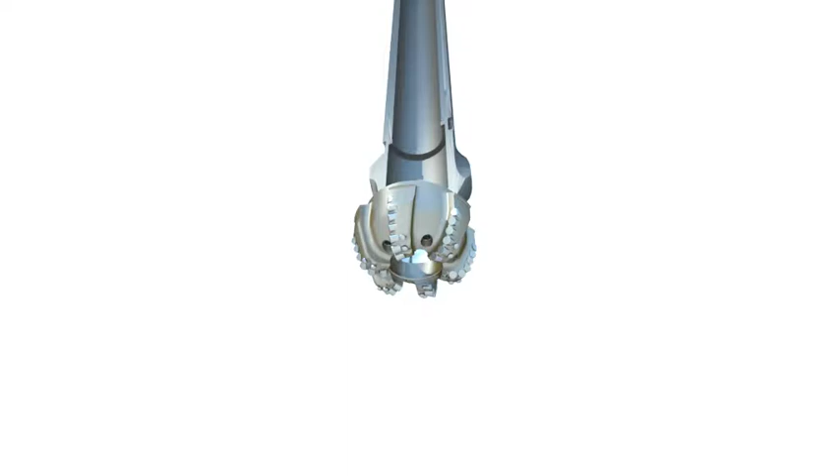In the specialized field of coring, the new Quick line, including Quick Core, Quick Drill, Quick Closure, and of course our pressure system, QuickCapture, are just some of the revolutionary new technologies bringing added value to oil and gas operators all around the world.

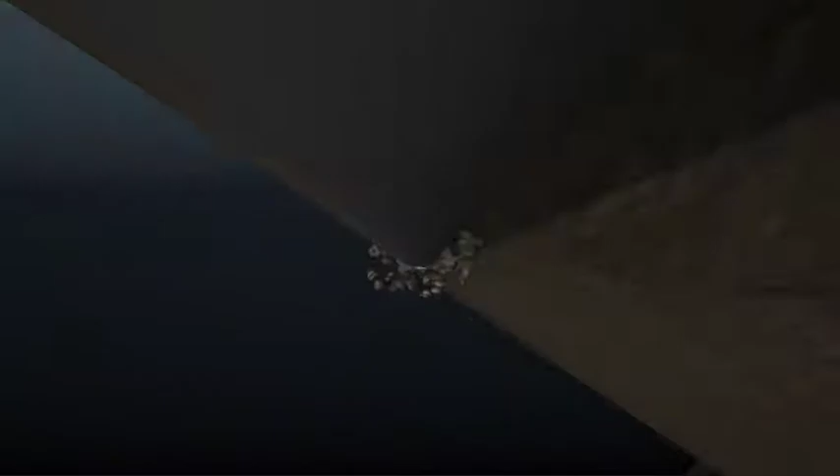The revolutionary technology behind QuickCapture has been developed to collect in-situ gases and liquids, giving a complete and accurate picture of the reservoir to guide productivity while speeding up the decision-making process. QuickCapture coring operations can be operated on both the conventional and wireline coring platform. The following animation depicts an example of running the technology on the Quick product line.

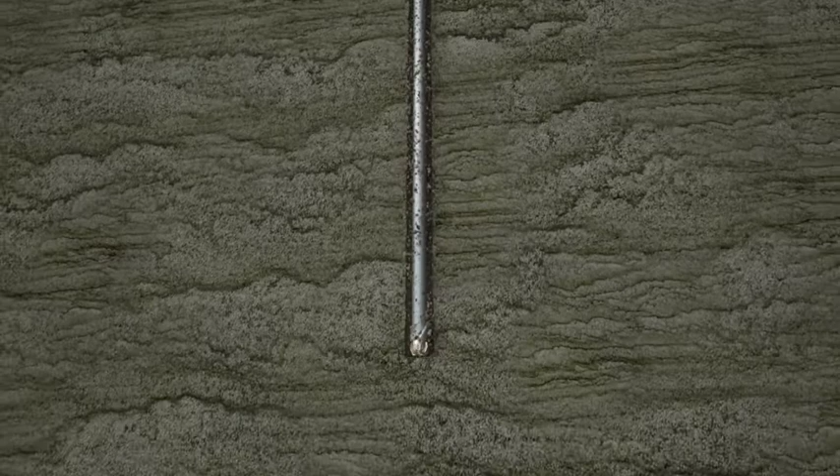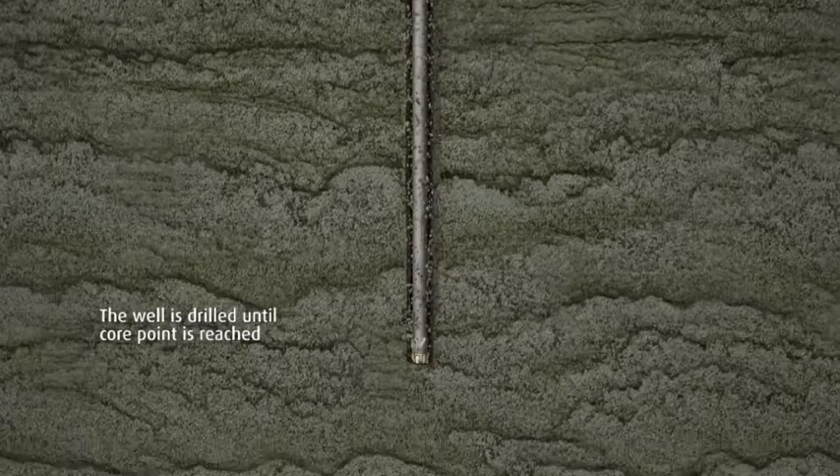The Quick Drill can be used to drill out the casing shoe, drill to the core point, and after coring to drill to TD without tripping the drill pipe. The drill insert is either set at surface or lowered into place via wireline and can be removed and reinstalled at will without tripping the drill pipe.

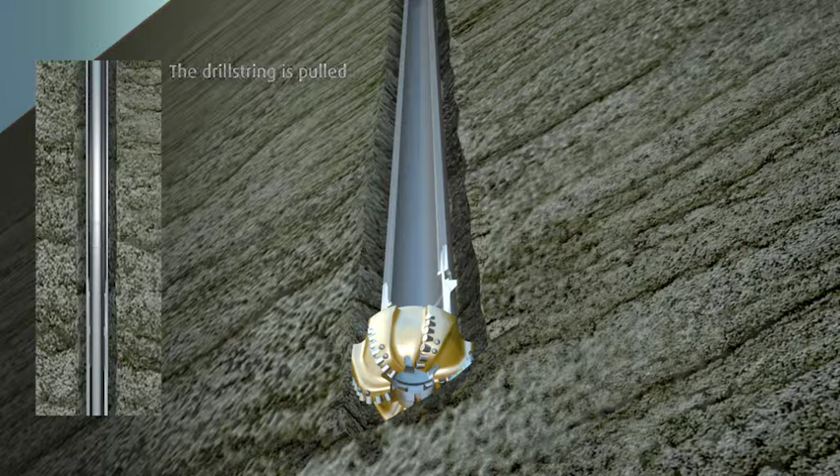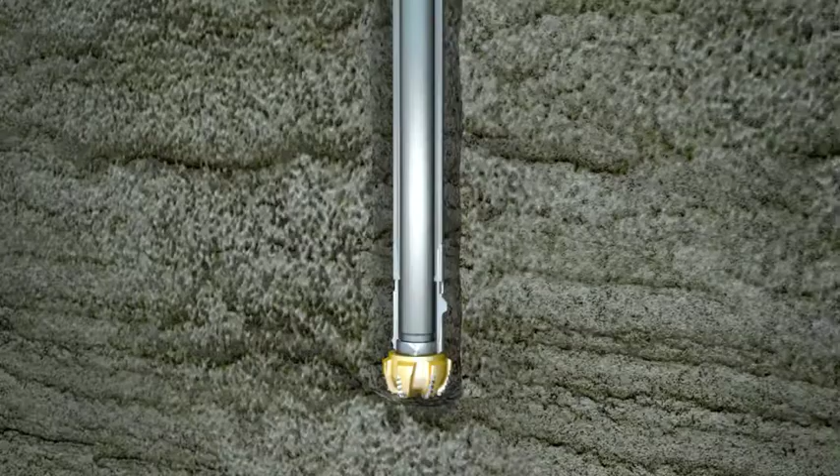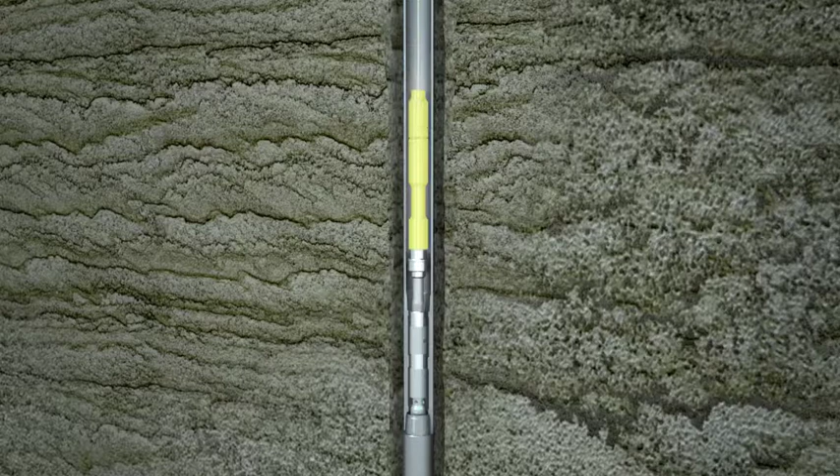Switching from coring to drilling can be done in a matter of minutes, saving valuable time for the operator. Mud circulation can be maintained at all times, while the Quick Drill insert is being set or retrieved, further improving well safety. Once coring is underway, the core is stored safely and securely in the inner barrel of the coring assembly. Once the barrel is filled, the inner barrel assembly can be extracted from the core barrel via wireline.

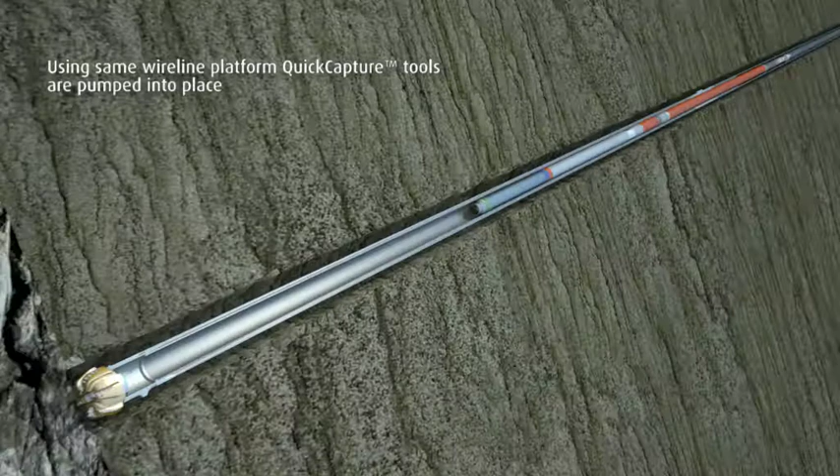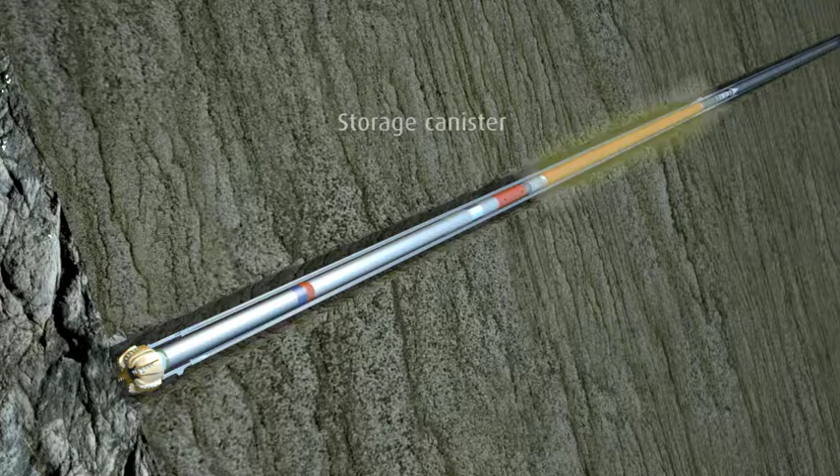Once the QuickCapture coring interval has been identified, the pressure coring assembly is pumped into place using the same wireline platform without having to trip tools out of the hole. The QuickCapture outer assembly consists of the same swivel assembly, outer barrel, and core bit. The inner assembly consists of a gas storage canister meant to collect any expelled gas or fluids during the trip out of the hole. The telescoping sleeve is used to collect the core.

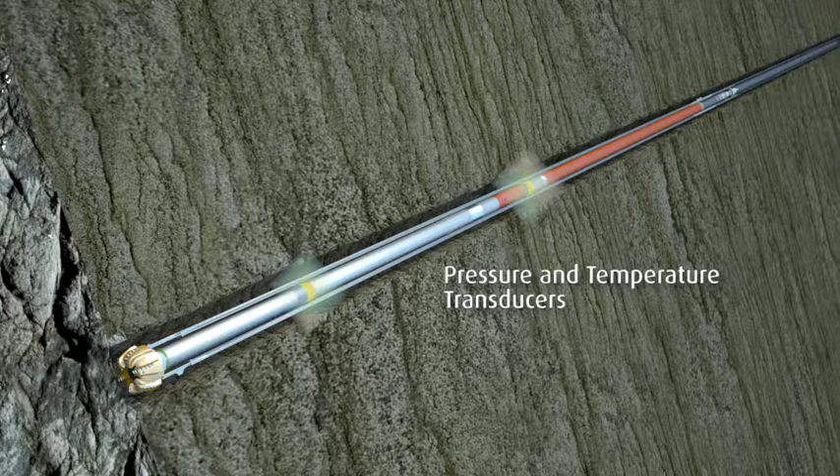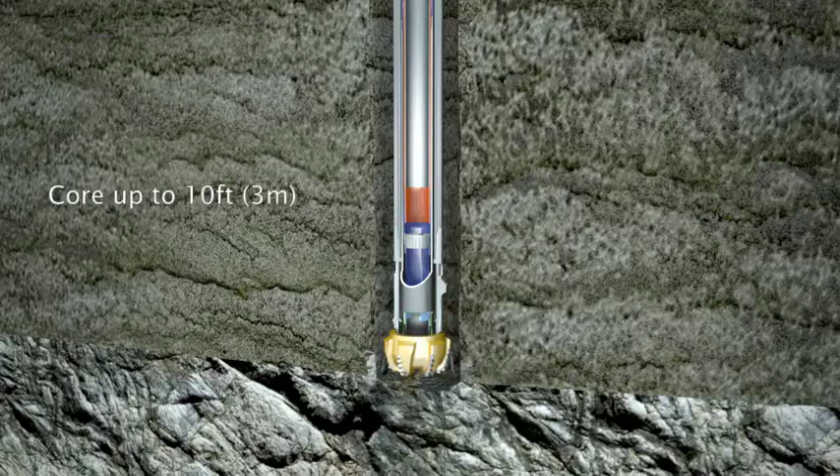Pressure and temperature transducers are used to monitor coring operations and the trip out of the hole. All of the core and associated gases and fluids in the tool are sealed by a proprietary sealing mechanism. Coring then commences, collecting up to 10 feet or 3 meters. After the interval is cored, the assembly is hoisted off bottom to break the core at the bit.

The wireline is run down and latched onto the QuickCapture coring assembly. An initial pull begins to set and stroke the tool, allowing the core to pass the valve assembly and seal the tool. A secondary pull disengages the tool, and the inner barrel starts the trip to the surface. As the tool is tripping out of the hole, all gases and fluids that are expelled from the core barrel are collected in the canister on top of the tool.

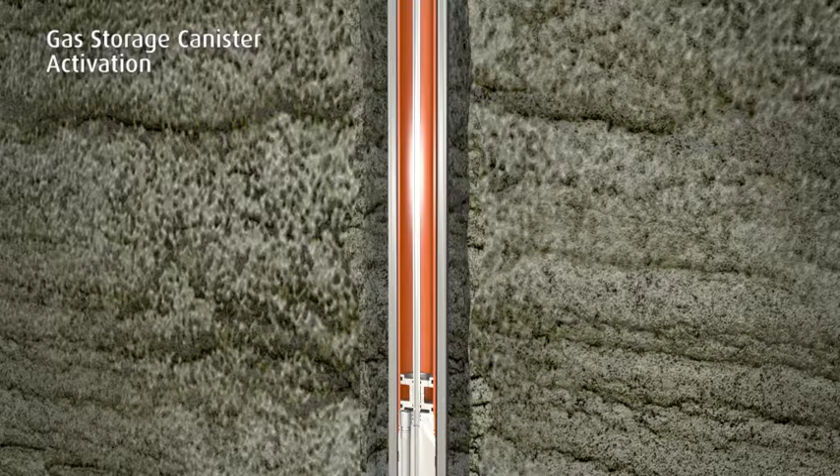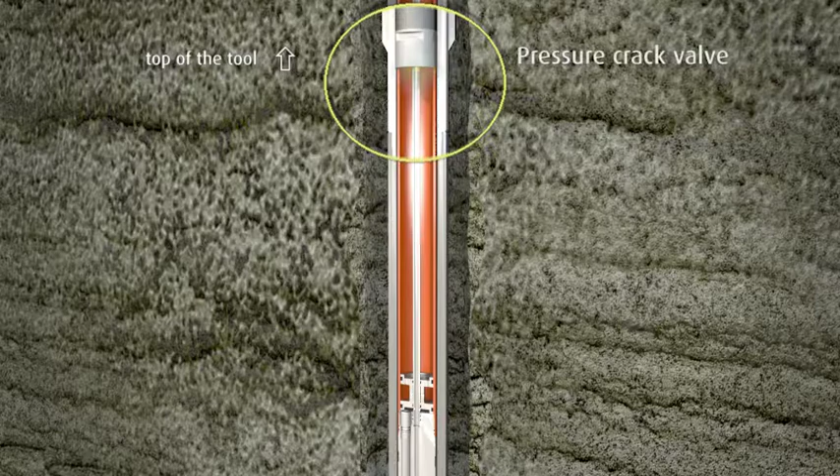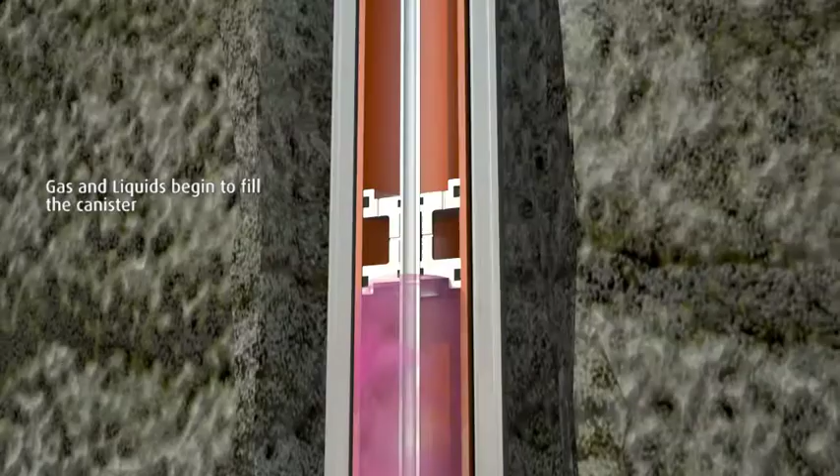The tool is not allowed to reach any pressures above 1000 psi, so as the tool is tripping out of the hole, all gases and fluids that are expelled from the core barrel are collected in a storage canister on top of the tool. Each canister is fitted with a pressure crack valve and pressure and temperature recording transducer. The pressure relief valve works by a pressure differential preset on the tool to allow communication between the barrel and canisters once the desired pressures are met.

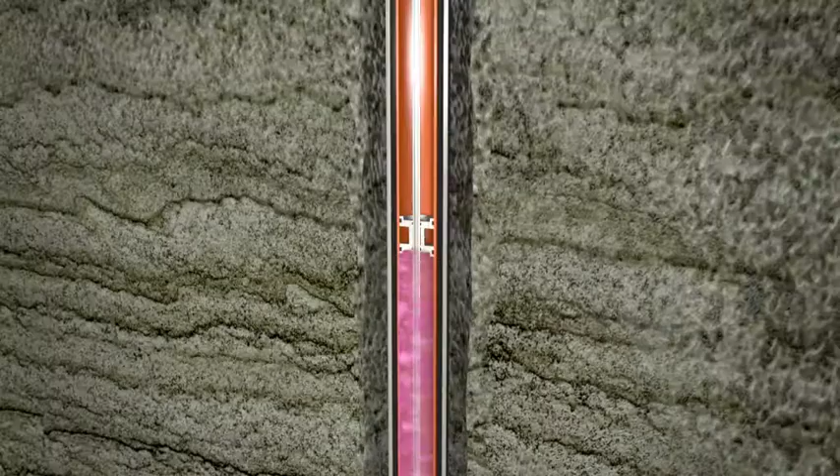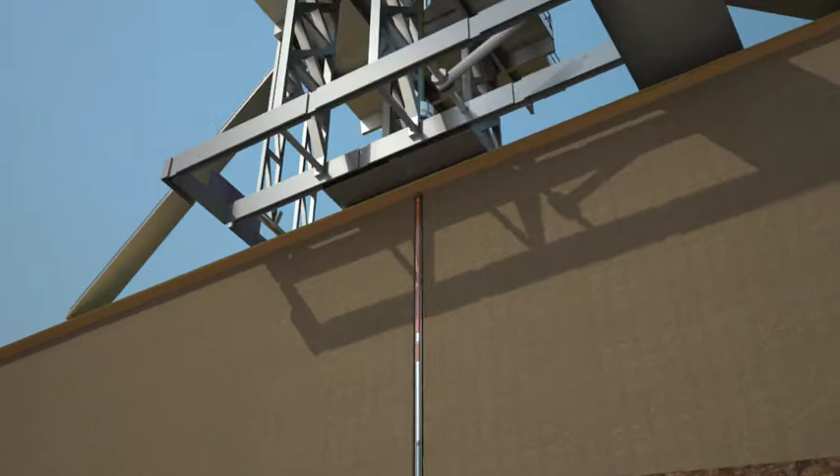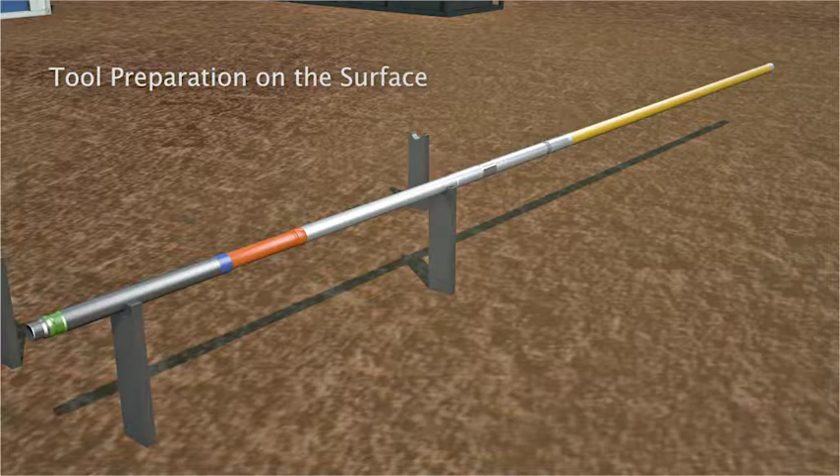As another safety precaution, the tool is fitted with a pressure relief valve on the barrel and canister. In case of any failures in the tool due to plugging or malfunction, pressure will be released from the tool until it falls below the set operating pressures. Once the tool reaches the surface, it's laid down and the barrel and canister recovery process begins. The tool assembly is broken down into separate components.

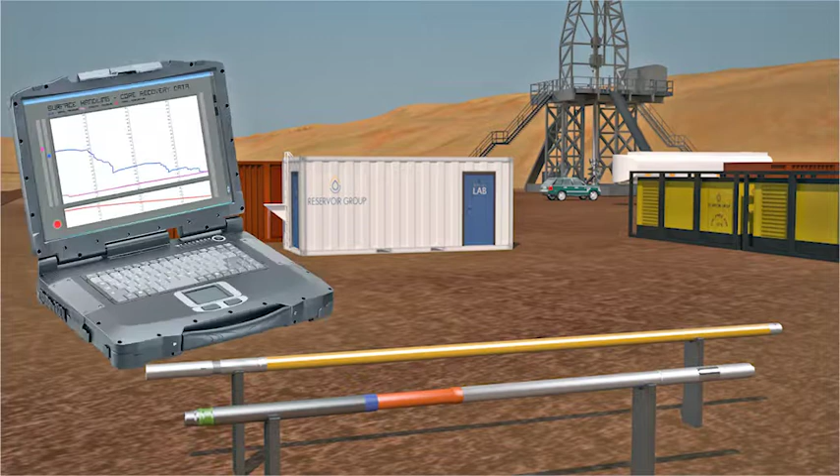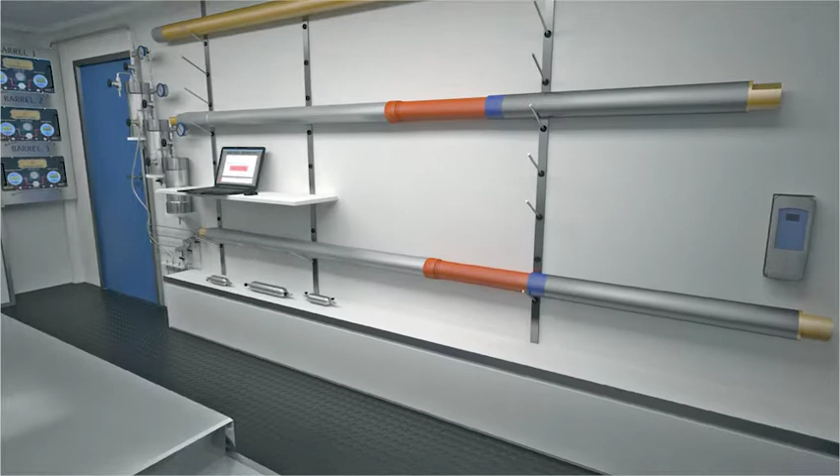Pressure and temperatures are downloaded from the barrel and canister to ensure downhole operations were successful, and the components can be safely managed in the on-site laboratory. The on-site lab is designed to handle multiple cores and canisters simultaneously. As the core barrel is still a live system, it becomes the first priority once in the laboratory. The temperature of the tool can be increased, maintained, or cooled to match the reservoir type or reservoir conditions. Custom designed heat blankets can be utilized to simulate reservoir conditions.

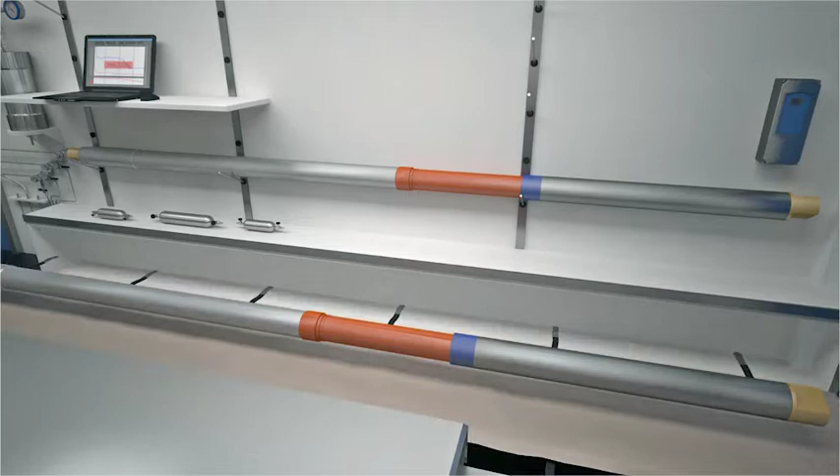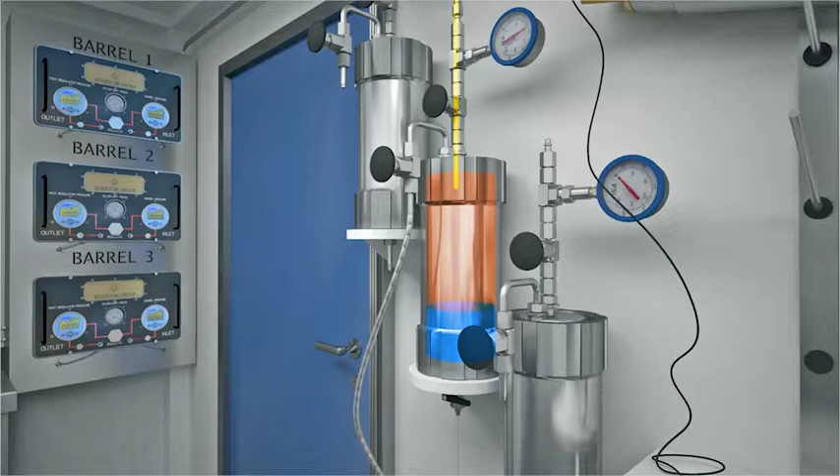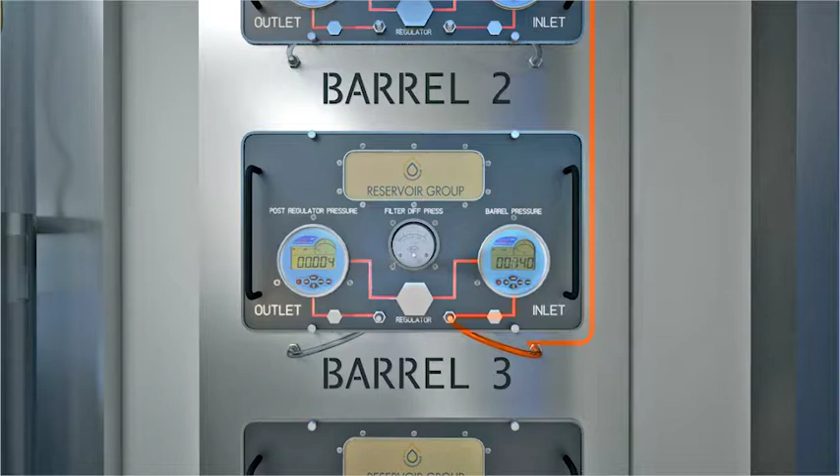The barrel's temperature and pressure is continually monitored during the depressurization process. At first, the pressure between the barrel and the separator is slowly equalized to minimize dramatic pressure drops that may affect the quality of the core. Fluids are separated out to eliminate contamination into the downstream analytical equipment. Pressure from the barrel is transferred to a pressure management panel to monitor the barrel and control pressure transfer to the gas measuring devices. The panel can monitor up to 3 individual barrels or canisters simultaneously.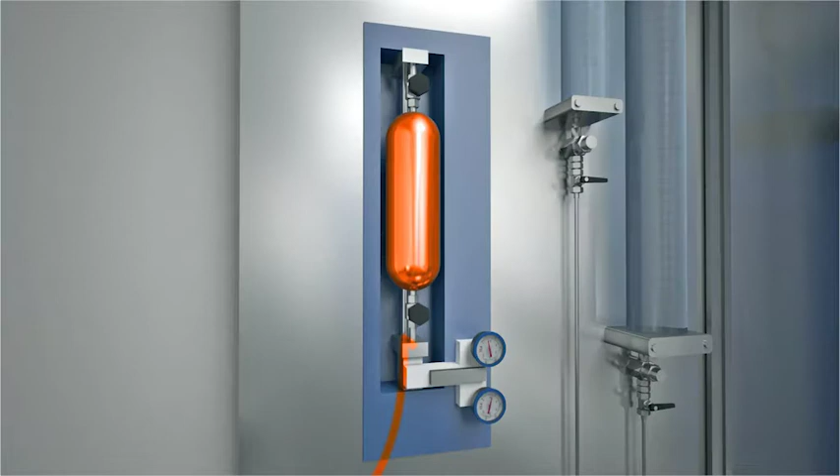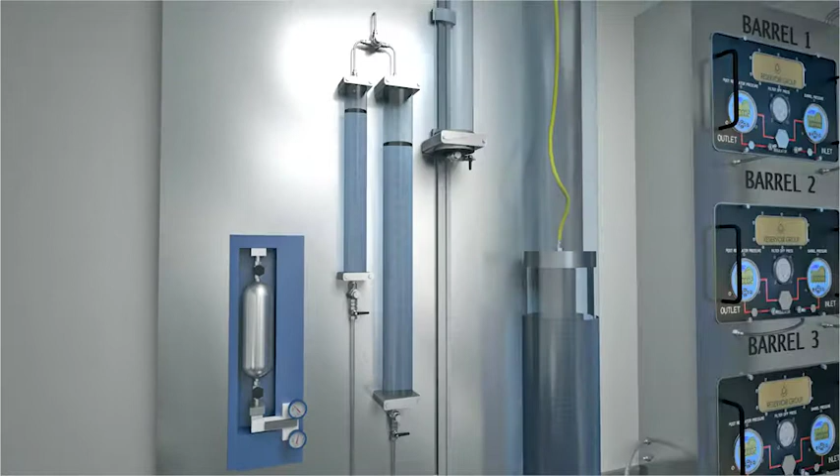A mass flow meter is set to control flow to the measuring devices. Initial flow rates are measured using a wet test meter. Gas samples are routinely collected for future composition and isotope analysis. A gasometer is utilized as a redundant empirical measuring device to validate total measured gas. In low gas volume situations, a manometer will be utilized. All fluid from the separator is collected for future laboratory analysis.

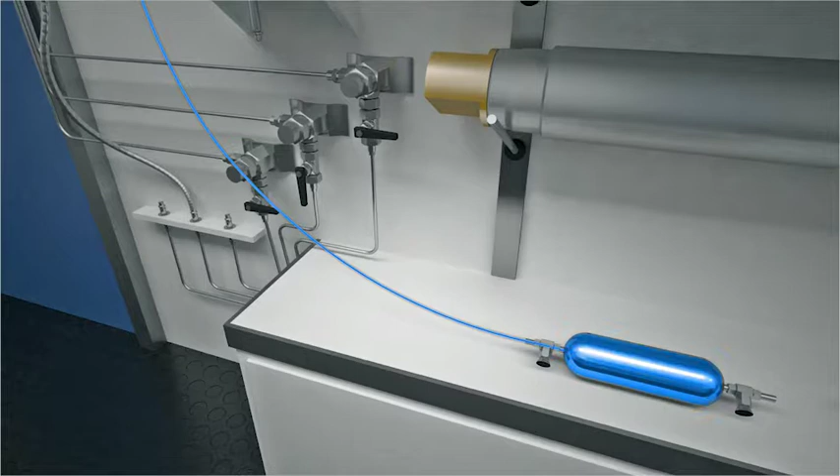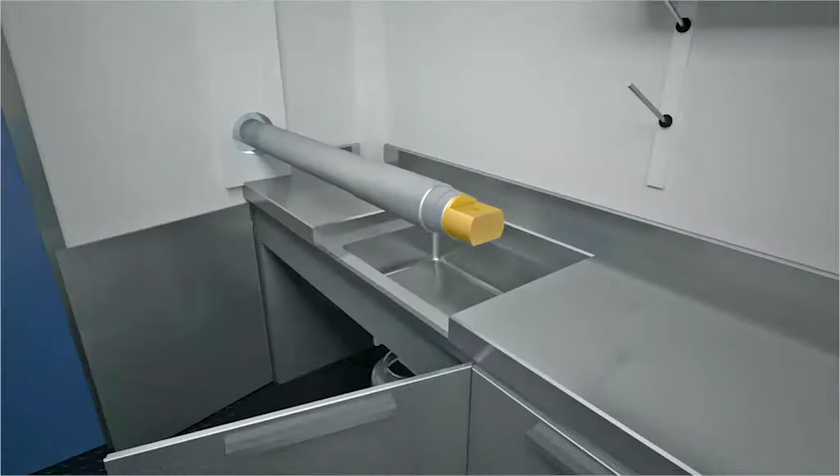Once the core has reached atmospheric pressure, the core is ready to be transferred. The extrusion process begins by draining and collecting fluids from the barrel. The core is then transferred to a sealed shipping canister. All remaining fluids are extracted from the barrel and combined with previously collected fluid.

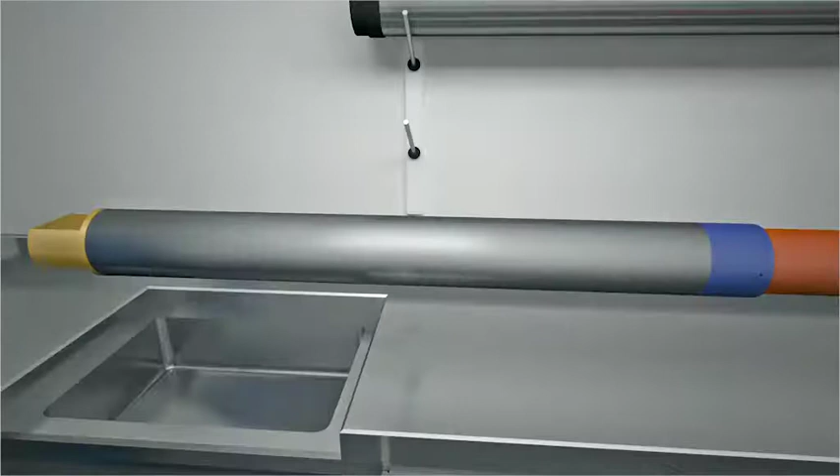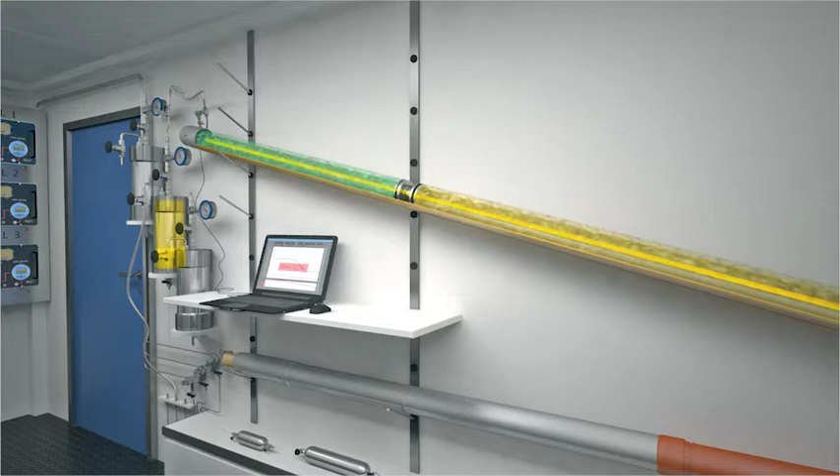The canister is depressurized in the same manner as the barrel. All remaining gas is measured by pumping the piston back to its original position. After all of the gases have been measured, the remaining fluid is extruded and collected. All samples collected are properly labeled, measured, and recorded before being packaged and shipped.

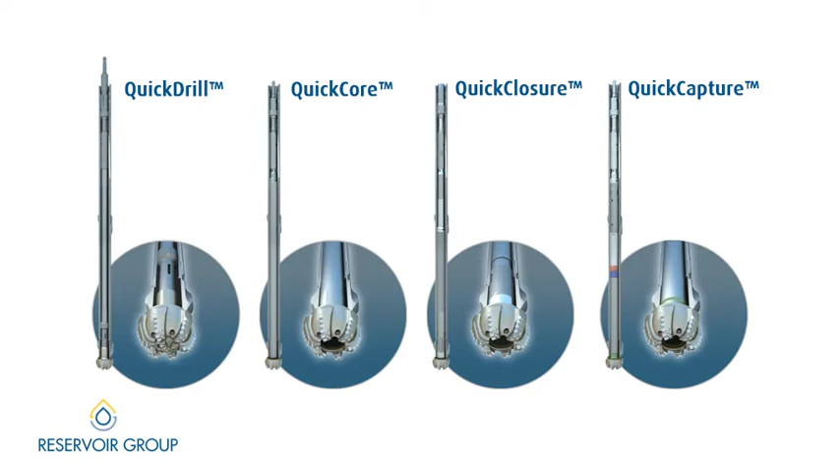The Quick product line produces a thorough, cost-effective solution to operators' formation evaluation challenges by securing the recovery of a quality core regardless of the formation type, whilst leaving the well in the optimum conditions for logging, casing, and ultimately optimized production.